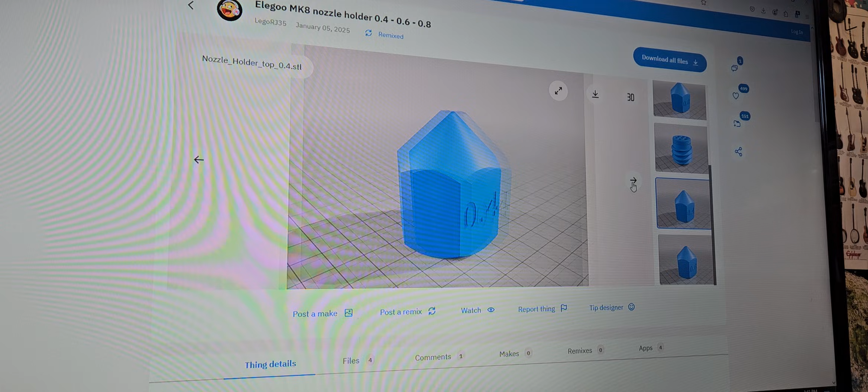Oh, this is pretty cool. Look at this. So what do you take? What do you absolutely not want to lose if when you walk out the door, you're going to lose everything else by fire or by theft? Someone's going to come in and steal it. What do you take? What do you leave?

I picked my radio. Maria, I'm sure, was thinking documents, marriage license, stuff like that. I got my radio, KJ601. I know it's... notice it's starting to...

Oh, this is for Elegoo. Yeah, we had to evacuate twice here.

I don't know if I have any of these. So this is for a Neptune 3, which I don't think mine uses.

Those are kind of interesting. This is kind of cool. I should print one if I just had unlimited filament to waste. It would take a long time to print, I think. I'd have to be bored.

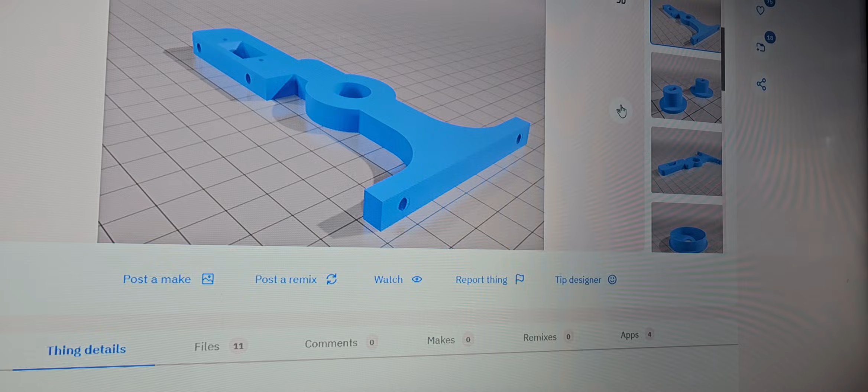Look at that, CNC drum plotter. Wow. Maybe 50 or 60 bucks Canadian.

He was mourning the loss, sudden loss of his at the weekend.

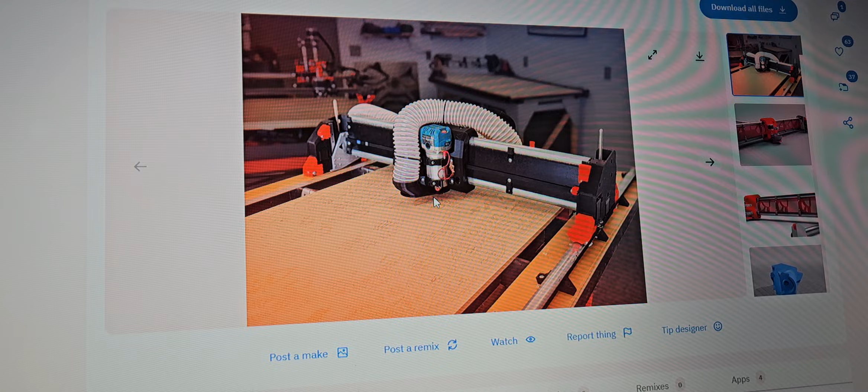Of the attack. Cool, there's another cool holder. Oh, that's cool, look at this. I'd love to build something like that. You see this guy's got like a whole bunch of them. Wow.

A lot of the things people print on here like this, they're gonna break. You cannot, I don't care what they're made out of. They're gonna break. It's the process of FDM, or whatever we want to call it. The way the layers are, depending on how the layers are, they're strong one way, not another. Depends on the type of filament, but a lot of this crap's gonna break.

A glider plane. Some crazy weird stuff on here. I don't know what this is.

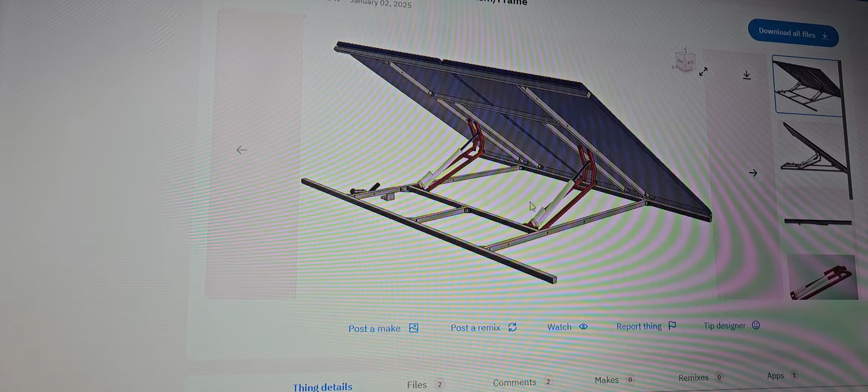Alright, this is a little ridiculous. This must just be 3D modeled. A low profile solar tracker mechanism. Pretty cool though.

Here in DC, it's amazing what we can make when we have no limitations and resources are not a problem. You know, it really is. When time and resources are not a problem, we can achieve pretty amazing things.

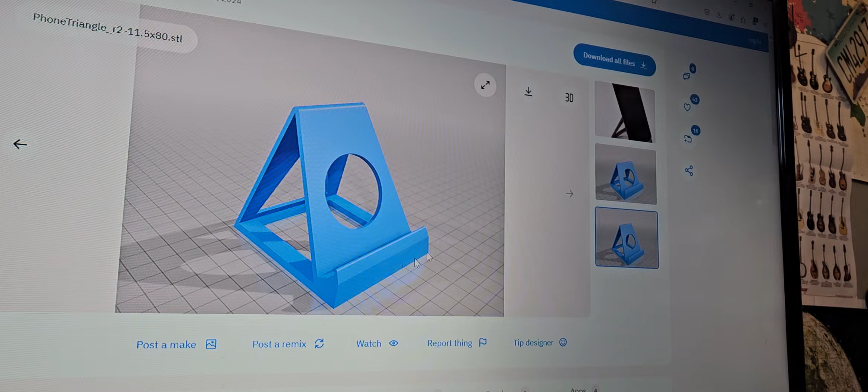So I think maybe I'll download this. They want a holder for their tablet. I'll modify it, stretch it out, and redo it. There's ones that fold, I don't really care for that.

Oh, look at that, microphone adapter. Microscope adapter. I was thinking maybe we work some FT8 or something. Did you do FT8? Wow. Pretty wild.

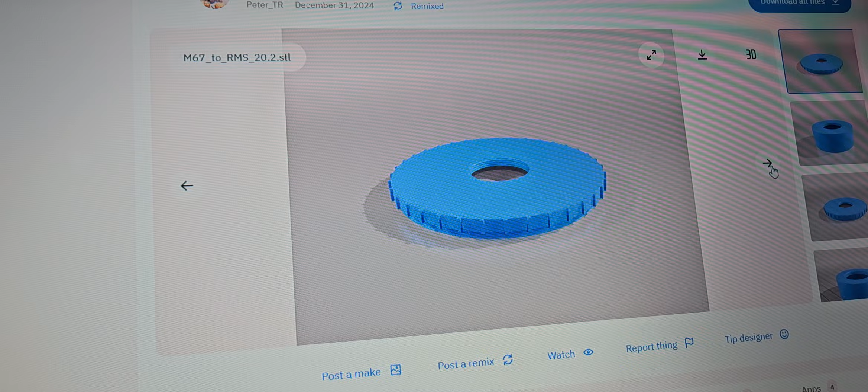You could come up with some pretty interesting pictures, like this here. Cool idea. Don't put too much pressure on it. Pi 5 case.